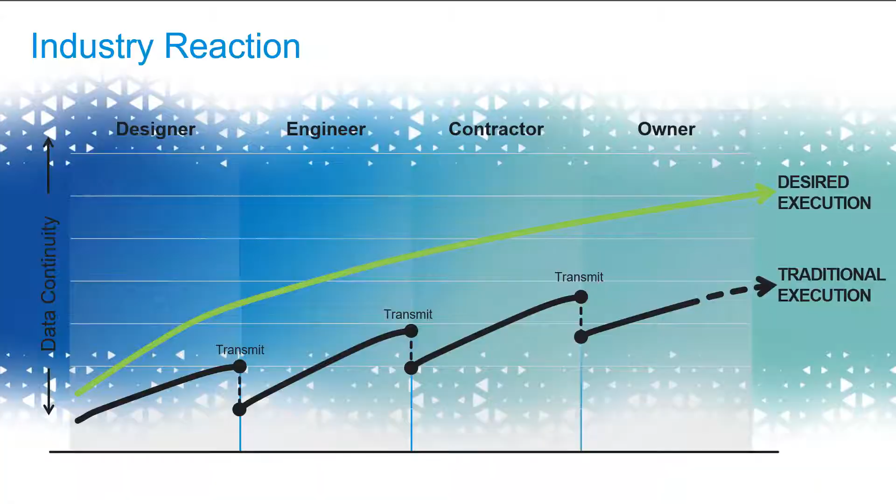So these are the solutions we are going to tackle with our AEC solutions today. We'll focus on security and accountability, on team communication, and on simplifying with easy to access tools the project complexity management. Let's start by discussing desktop-based collaboration. Desktop-based collaboration is covered mainly by the AEC collection, which is part of our plant design solutions. So we will use AEC collections and BIM 360 to collaborate around our plant projects.

Here's a short example of a simple workflow based on plant design tools included in the AEC collection. First, we can take a look at the P&IDs, the process and instrumentation diagrams, and then based on those process drawings, we will focus on piping equipment, steel structure, which is covered by Plant 3D, some building elements covered by Revit, coordination with Navisworks, for example, and then we will also discuss the deliverables, which in Plant 3D are the bill of materials, the isometric drawings, and the ortho used for layout drawings.

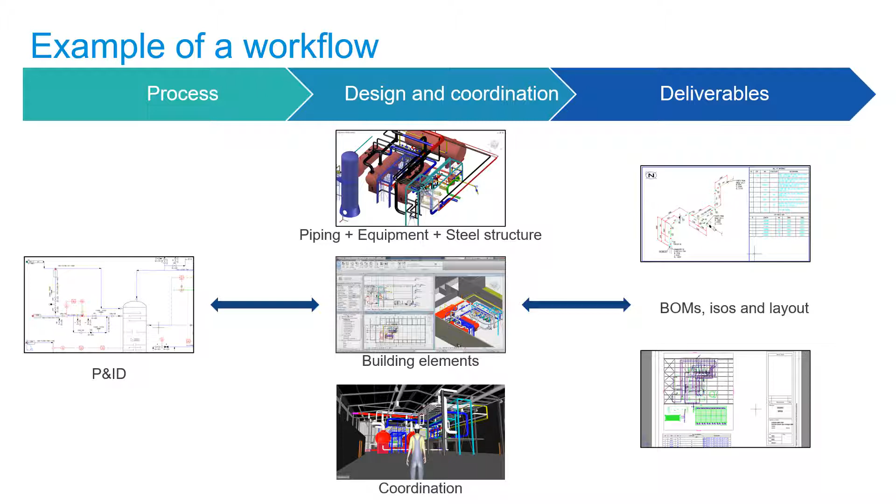The Plant 3D environment is easy to access and allows fast project creation and management, as you see here. We have a very easy to access wizard to create new projects. The database is set up automatically. It's either SQLite or SQL Server. We'll discuss that in the third video. Customization is quite simple since it's needed by most of the users. This will be very important to us, and there's no real programming to do it. It's quite simple and accessible. Project templates for project replication. So this is also part of the ease of project creation.

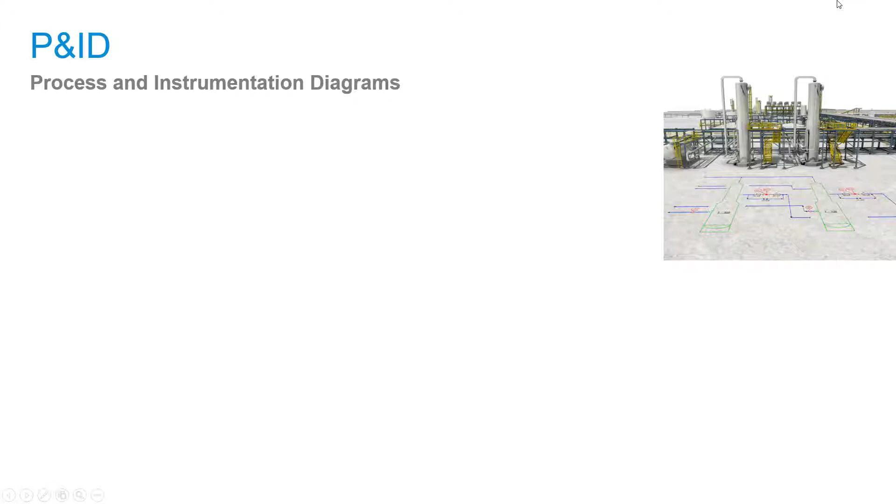And we are on the AutoCAD platform, so we can import and export DWG files very easily. If we had to look at the P&ID drawings a bit further, again, the two master words here, master ideas, are easy and fast drawings, using standard symbols that can be easily customized, of course.

We can model the diagrams, the drawings, using specs and respecting specific specs that were set up by CAD admins. The lines and the components are of course intelligent, so they are dynamic. The symbol management is quite easy to access with graphic interfaces, graphic UIs.

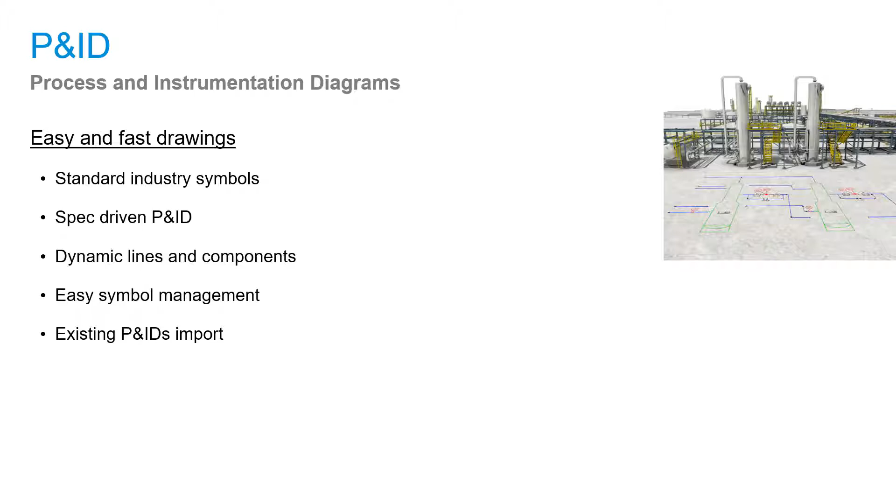And we can also import existing P&IDs, not only digital, but also sometimes scanned ones. The data management is the base layer of our solutions. This would be the database, which is organized in a project tree. The project tree is just a Windows folder, easy to move, easy to manage, with folders, subfolders, and all the files. The database is, as usual, in this project folder.

Deliverables, drawings, quantities, bill of materials. Intelligent link drawings, that's another thing to discuss because that's quite important. All the P&IDs can be intelligently and dynamically linked together from a line to another. You can revise data using the data manager of Plant 3D, and the tags are also dynamic. So when you tag line components, they're dynamic. They are changing when the line changes.

The first point of access for editing or informing people about the project would be Microsoft Excel, which is quite easy to use and well known. So we can export spreadsheets and import them back. The system will recognize changes in this case. And we also have consistency checks between P&ID and 3D data, 3D piping. So it will enable us to make the project consistent.

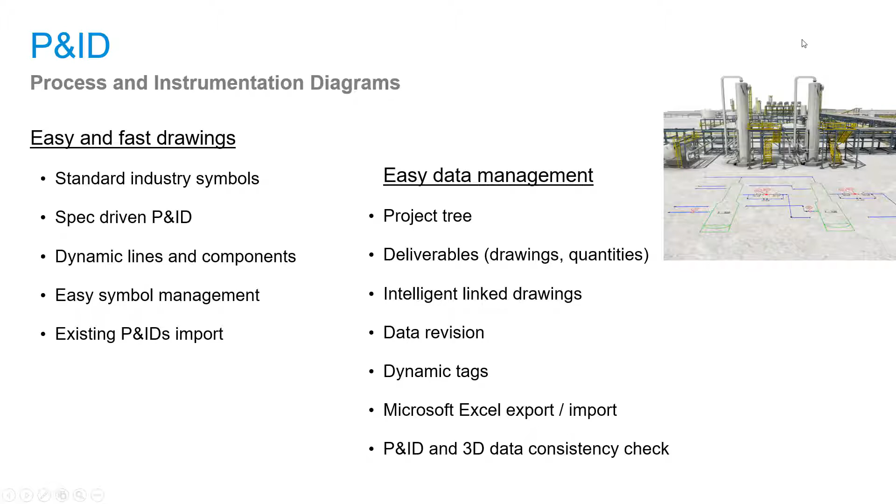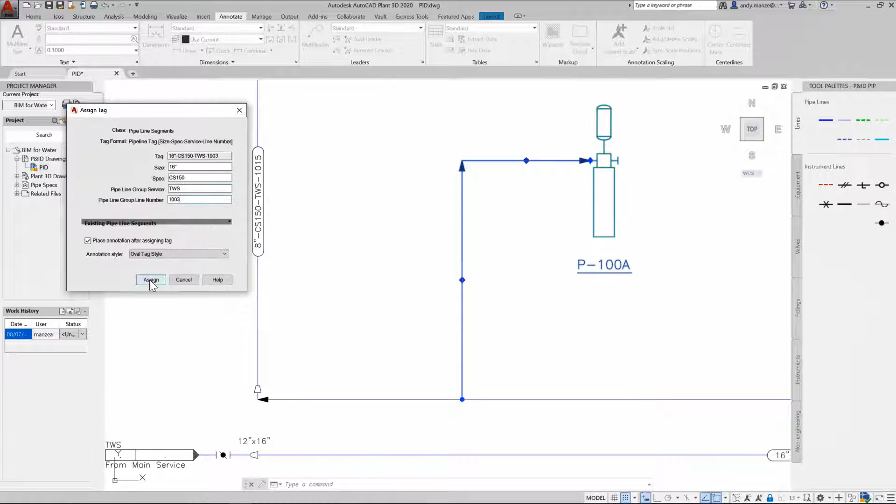Let's take a look at a short video around P&ID. As you can see, this is the P&ID interface. The project manager on the left manages the whole project. Now we are using a spec-based tool palette to model equipment and lines. We can modify them, assign tags based on specs that were set by our CAD admin. We just need to name the spec, name the diameter, and the tags are automatic and dynamic.

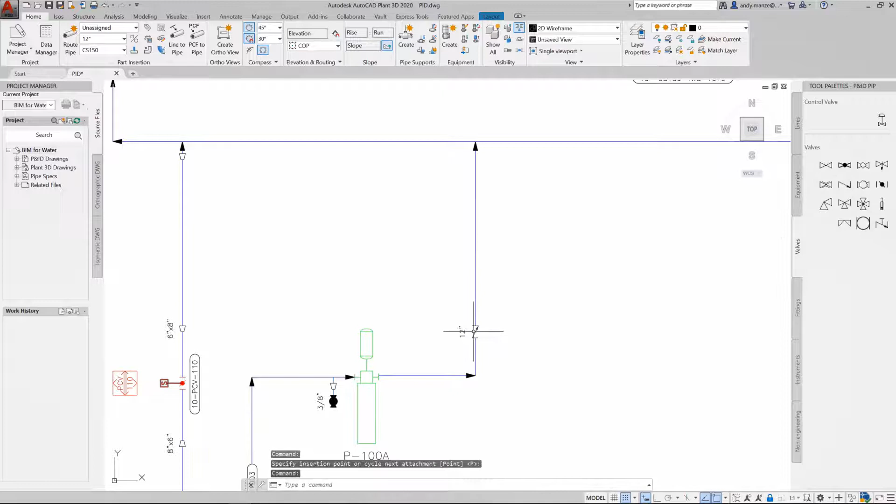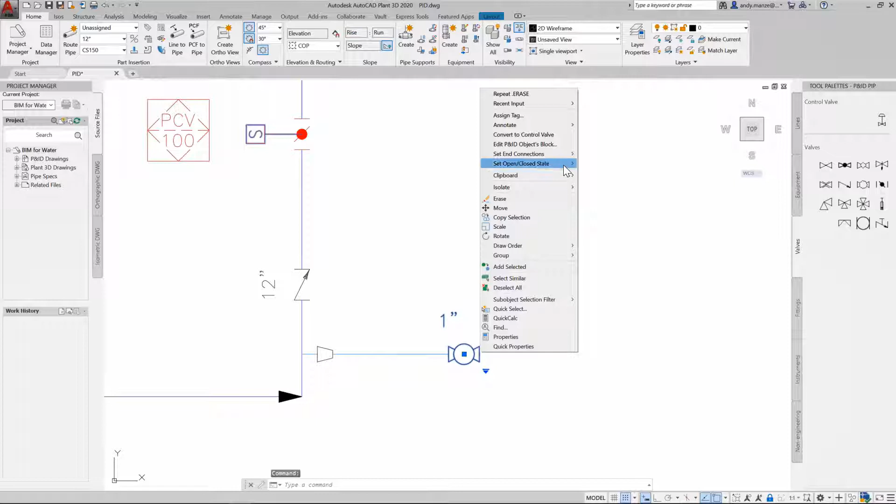The valves and other inline elements are completely dynamic. As you can see, if we change the diameter, the tags are also updated automatically. So this is another line we are creating here, inserting one or two gate valves, which are again dynamic. And we can also use instrumentation valves to control our lines. So this is the instrumentation part. We can easily control our valve status and use AutoCAD's classic copy-paste feature to copy-paste P&ID elements.

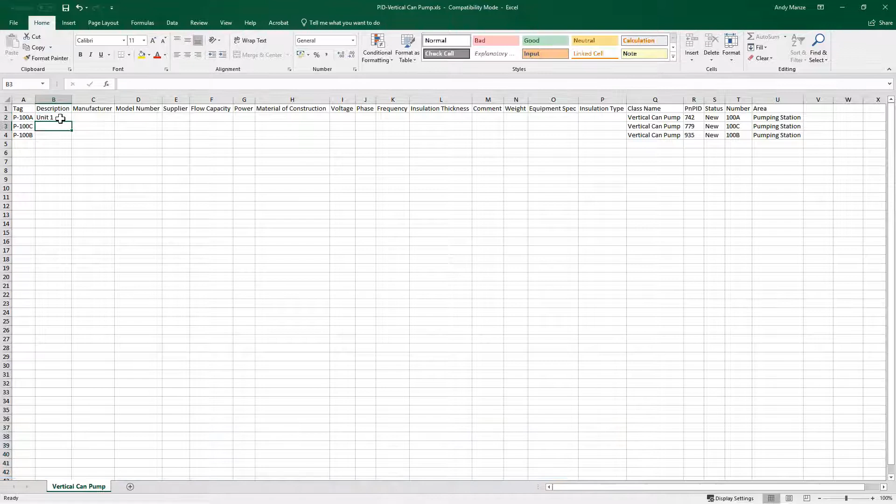This would be the data manager. We can use spreadsheets to export the data. An engineer can, for example, dimension a pump or change a valve status, and then we can re-import that back from Excel. The data manager highlights all the changed elements and we can either accept or refuse all the changes. Equipment or valve reports are really easy to set up as well within the data manager in the solution.

Let's now talk about the 3D aspect of Plant 3D, I would say, which is all about piping, equipment, and basic steel structure. The pipe routing here is spec-based, just like P&ID can be. The equipment is parametric. We can draw basic steel structure like columns, beams, stairs. We can also import and export Microsoft Excel spreadsheets, as you saw for the P&ID.

And then the deliverables would be isometric drawings, layouts. We call them auto drawings, layout drawings. And we can also fully customize in a very easy way the catalogs and the specs. And as mentioned earlier, the 3D aspect of Plant 3D is also integrated with P&ID, with sanity checks and reuse of P&ID data automatically, for example.

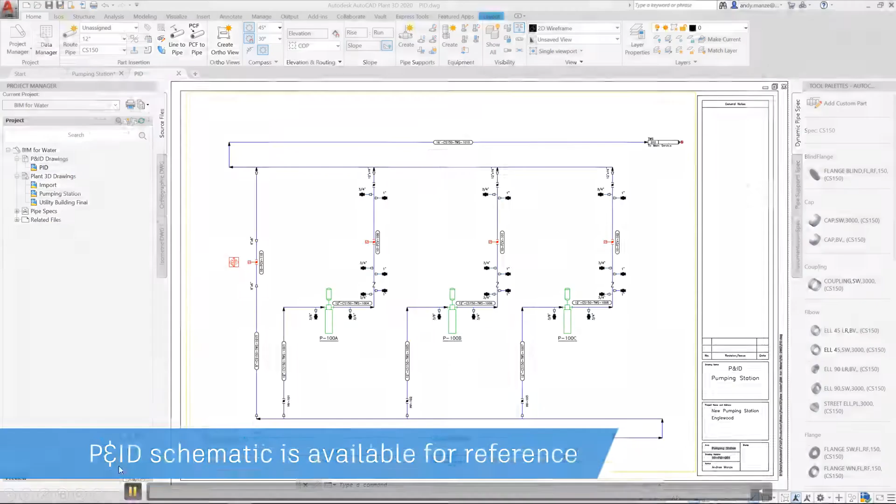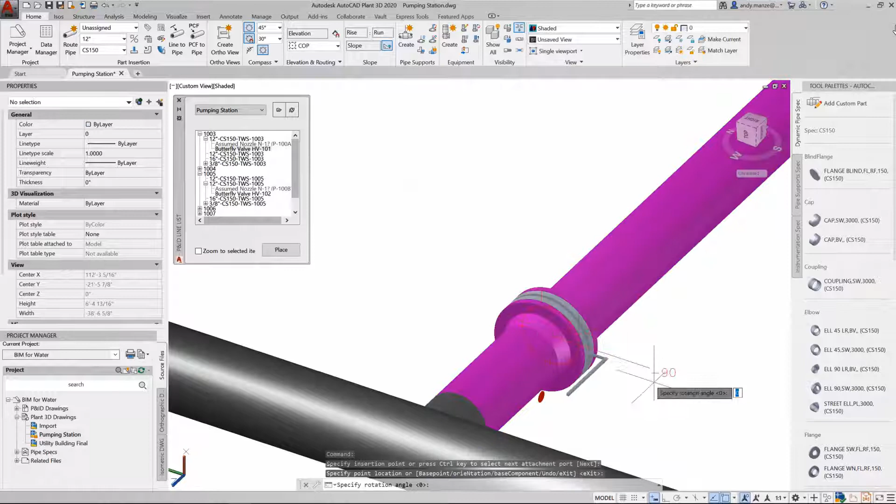Let's take a look at a 3D piping video. So we will reuse the P&ID elements. You can see them in the list here to draw, to model the 3D piping on this 3D drawing. So we just use two P&ID lines. Then we will add the inline elements, the butterfly valves we had on the P&ID. As you can see, the elements are fully intelligent.

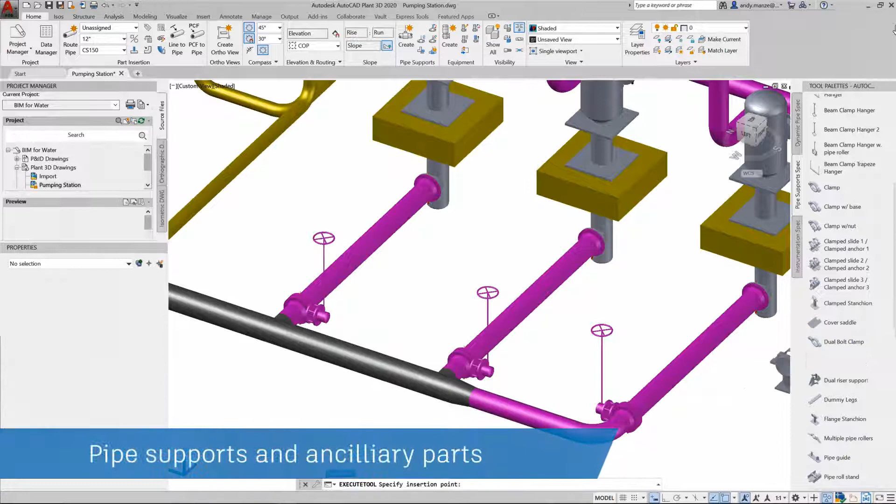We can change the levers, for example, if needed. This comes from a specific library that can also be customized. You can also change some of the geometry in this drawing. We can add supports that adapt automatically to the nominal diameter, for example, and to the line tag. They can be easily modified. This solution can be used with metric units, but also imperial units.

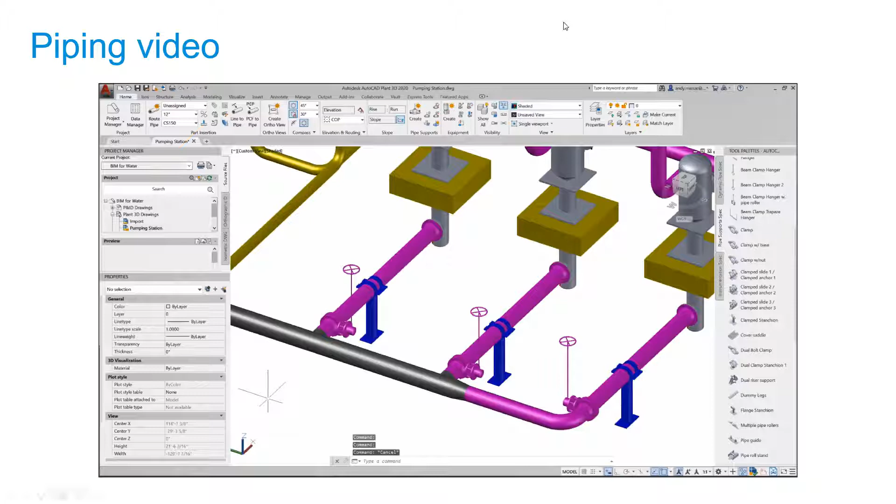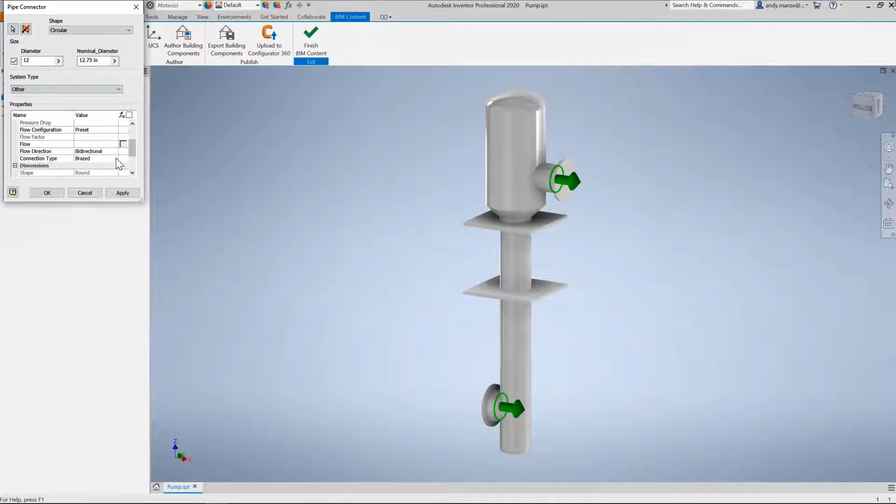Let's take a look at the equipment aspect of Plant 3D. We have a quite nice and complete library of equipment elements. But should you need to customize that, you could also import elements from equipment design software such as Autodesk Inventor. This is what we do here, and the export will keep the main setups like the entry points, etc.

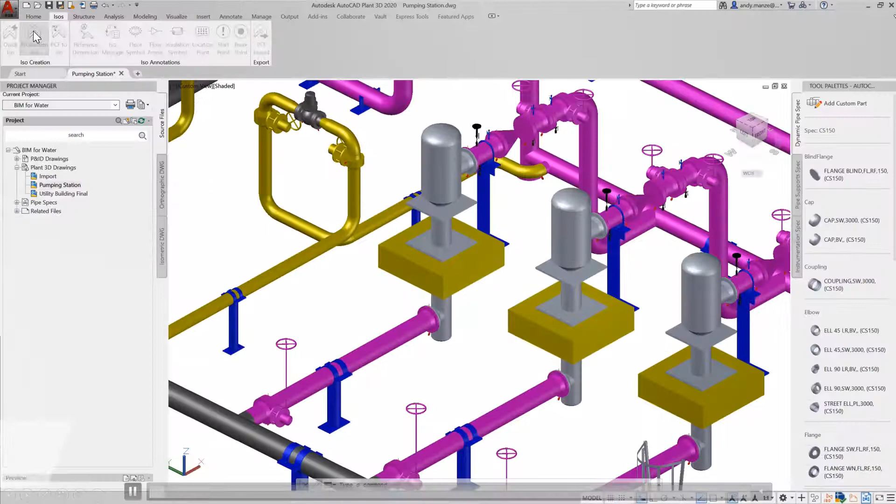Let's take a look at deliverables. Again, based on our 3D modeling, we can easily generate isometric drawings, but also layouts, piping layout drawings. We call them auto drawings. That's what you see now.

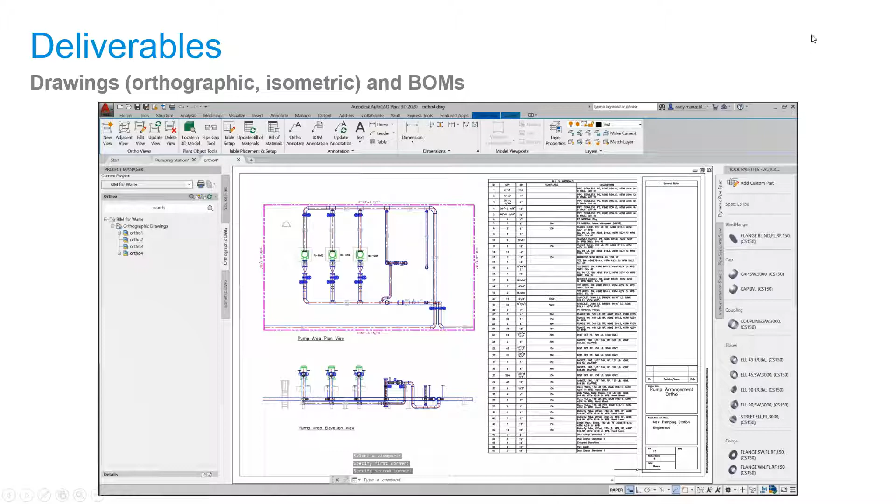You can add bill of materials from these elements on the drawings, which is very important. So isometric and orthographic drawings with full bill of materials, dynamic bill of materials.

Should you need to build a full project report in terms of deliverable, that's also important. We can easily query the plant database to build more complete reports around more elements than we can do in the plant project with data manager.

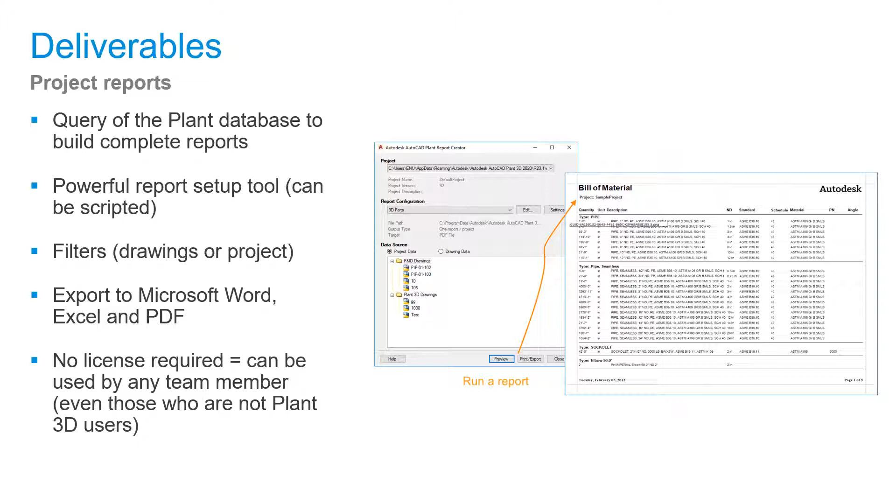Here we will use the report creator. This is an external tool for which no license is required, so anybody can basically access the project without being a plant user and without needing a license. So this is a powerful report tool that can be scripted and customized. It contains filters working for drawing or projects, and we can easily export a consistent project report to Microsoft Word, Excel, and/or PDF format.

Let's take a look at Revit. Revit will help with building elements here. Just as a reminder, a Revit file is just one full database containing everything. In fact, it contains parametric families - all the objects, views, and all the elements you can have in a Revit file are called parametric families.

This solution addresses three main groups, which are architecture, structure, and mechanical, electrical and plumbing, MEP. You have a very quick, short example of the different extensions of Revit files on this image.

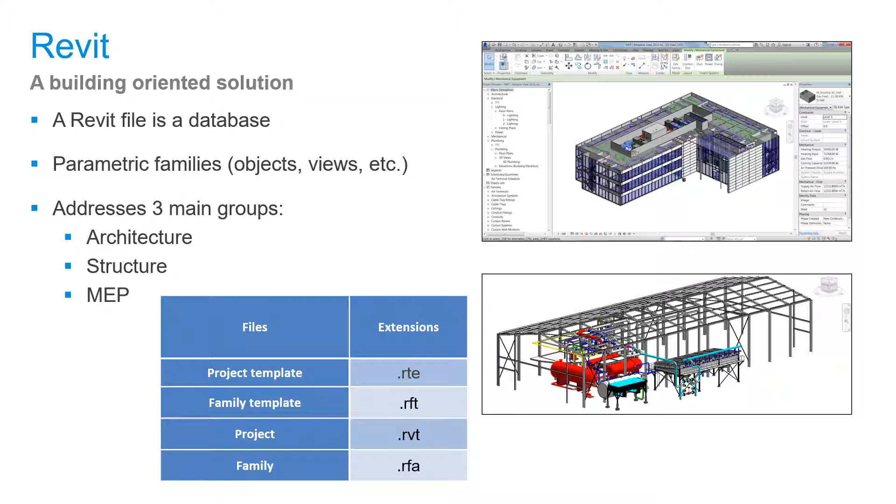In a Plant 3D project environment, Revit will help with building elements, mainly cable trays and ducts, but also concrete design for formwork or rebar, should you need to design these elements.

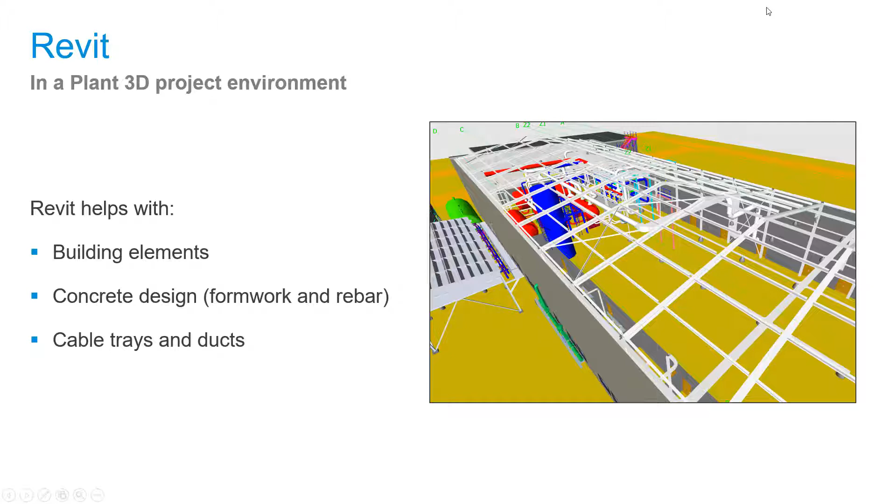We also have Advance Steel for steel detailing and fabrication. This is, of course, another AutoCAD-based application that communicates quite well with Revit, Plant 3D, and Robot Structural Analysis.

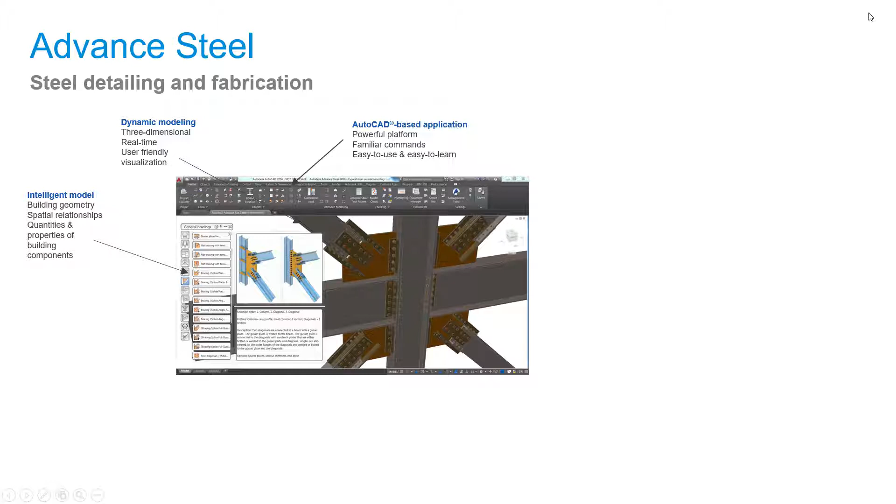The idea here is to use dynamic modeling, using a very dedicated tool palette with pre-created elements that you can just change. You can easily change the geometry and the forms. We have a bunch of steel connections.

There is also a clash check functionality. You can use this for customer presentations, of course, but one of the most interesting aspects is also the BIM workflows - the connection, as mentioned, to Revit, Robot, Navisworks, Plant 3D, which is of course native.

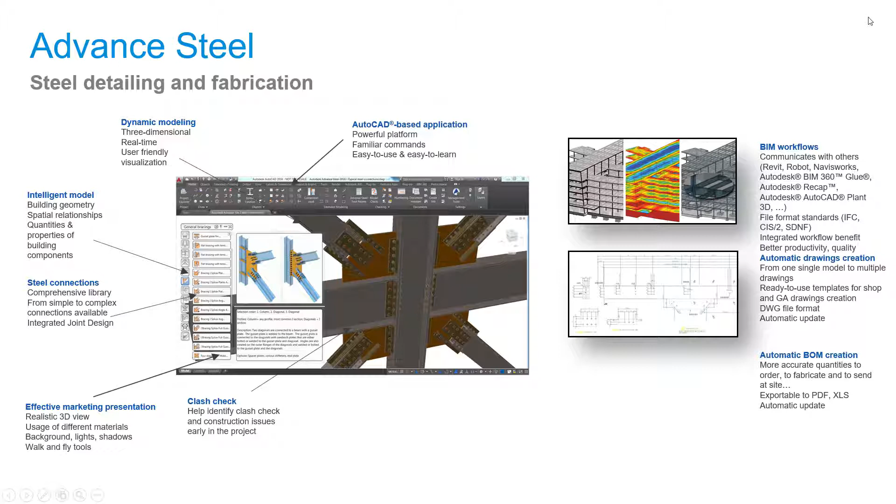Based on that, we can easily generate fabrication drawings for steel members and connections, but also perform automatic CNC data creation. You can work in a multi-user or single-user mode.

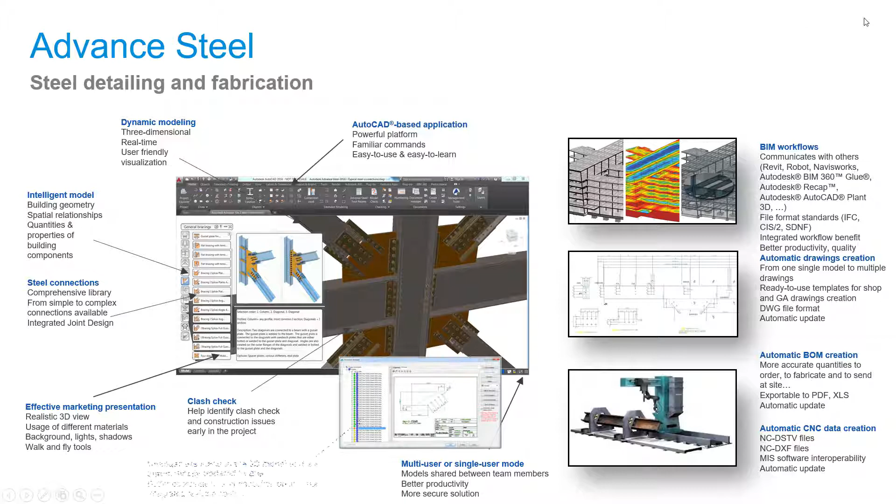Should you need to perform multi-material analysis or code check on your structures - be it steel structures, concrete structures, even timber structures - Robot Structural Analysis helps with that. You can also perform dynamic analysis, for example seismic analysis, on your structures to see if they fit.

Also, for example, steel member supports can be dimensioned and code-checked with this solution. Robot is integrated with Revit, Advance Steel, and also Plant 3D.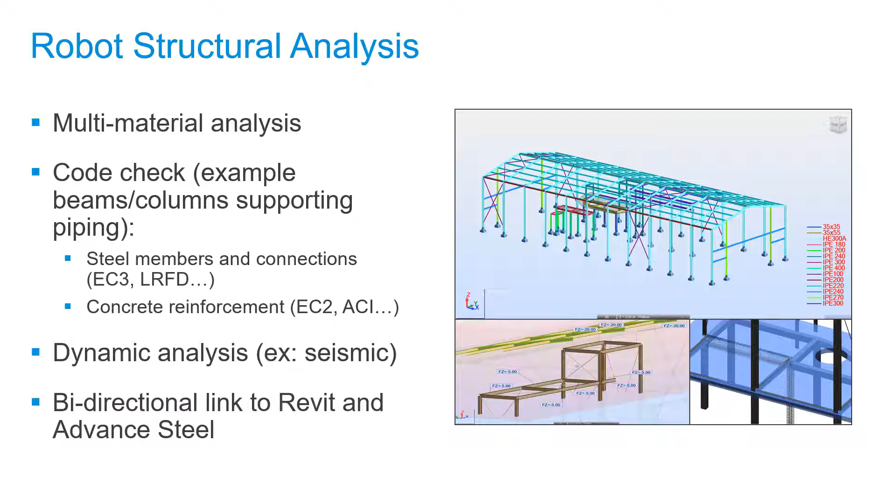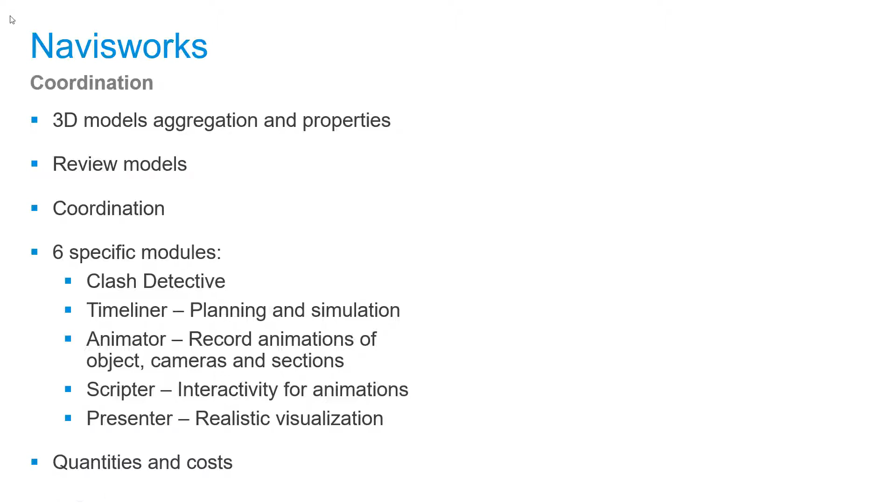For coordination purposes, we can use Navisworks. Navisworks is a great 3D model aggregator. We can aggregate models, but not only models - also the properties of these models - and bring together multiple format files. We can then review models and coordinate them thanks to 6 specific modules, like Clash Detective, which checks clashes. This is the one Navisworks is most famous for.

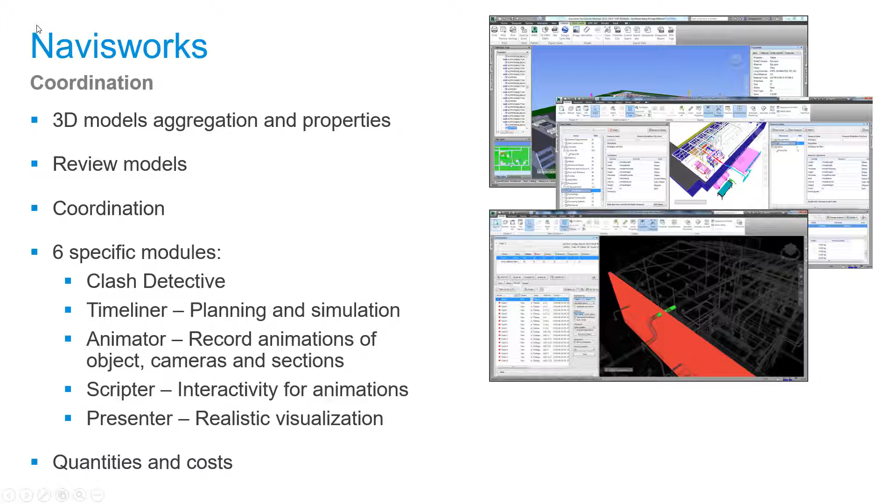Timeliner, Animator, Scripter, and Presenter - those are the 6 specific modules that help, for example, connect construction to a construction planning. We can also easily generate animations and script all that to make realistic visualization presentations. Another aspect of Navisworks would be the management of quantities and costs in a construction environment.

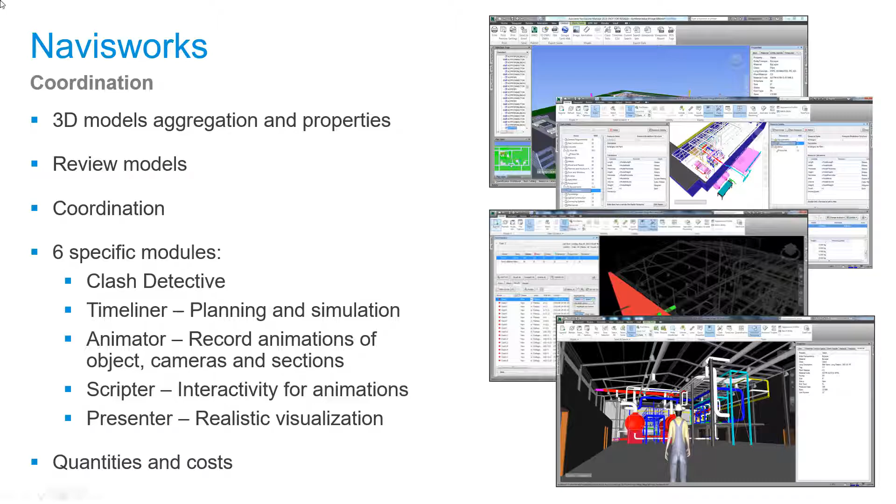Let's take a quick look at the coordination video. This is a complete pump station 3D model combining Plant 3D, Revit. This is Revit. This is Navisworks. This is where we combined all the models together, aggregated all of them, and checked clashes - for example, steel beams and pipes.

We can then assign a clash in a really easy way, and people will be notified. They will change their design model, and we can bring that back to Navisworks.

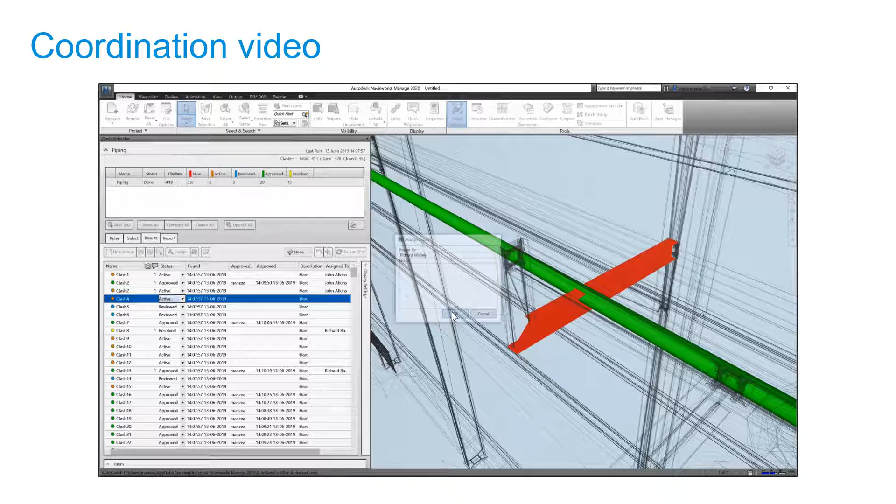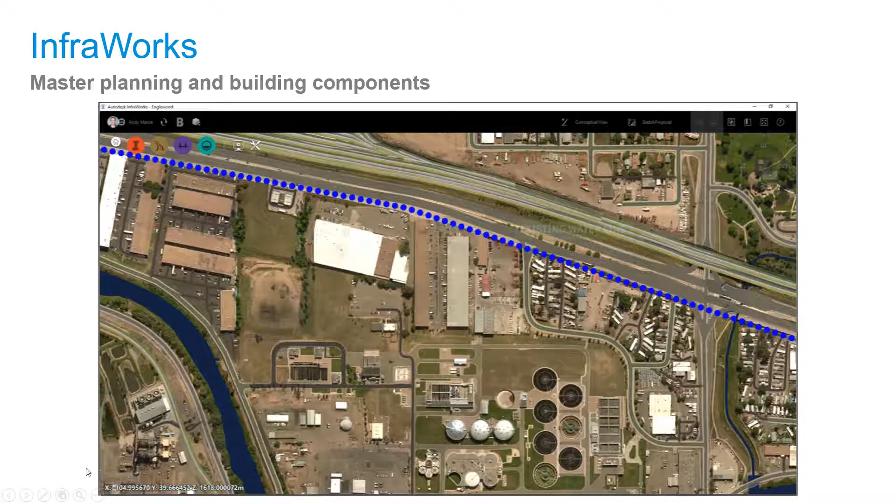Should we need to address master planning and building components, we can use InfraWorks, which is another great solution included in the AEC Collection. You can study master planning, surroundings, bring that into Revit and Plant 3D, and build the elements.

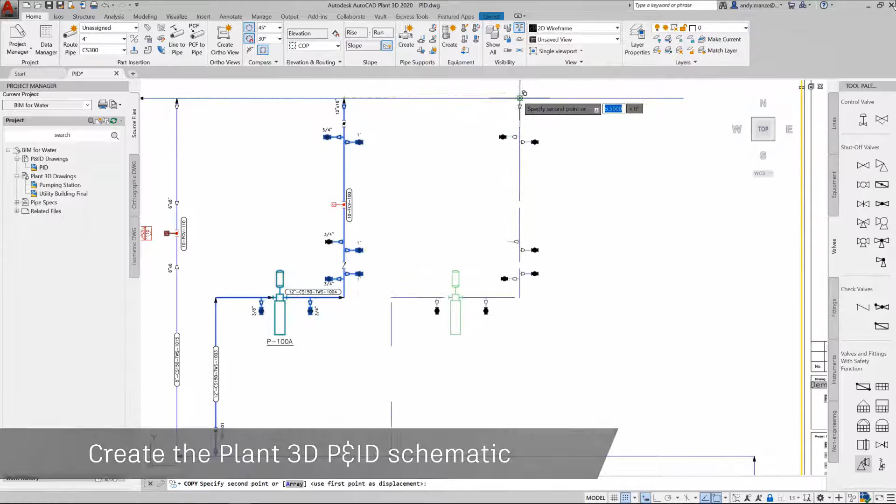They use P&ID to understand the process when designing or pre-designing the facilities. All this is linked to the database and everything is linked together, P&ID and Plant 3D, as stated before.

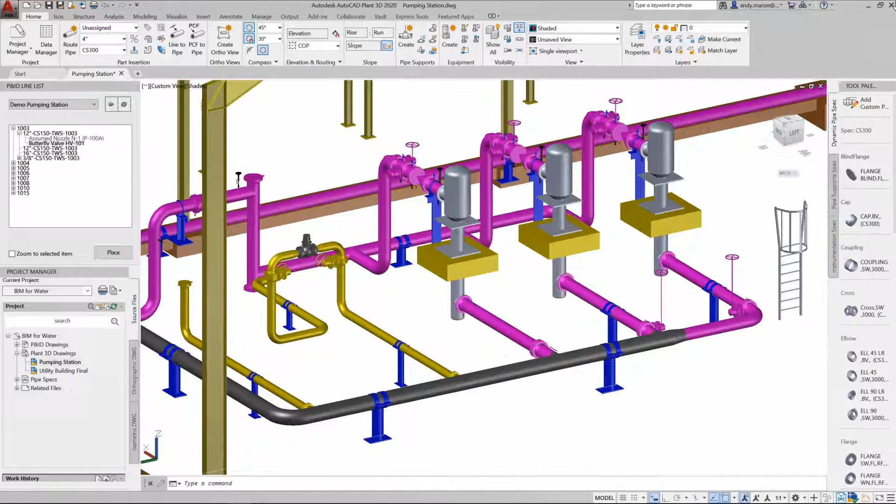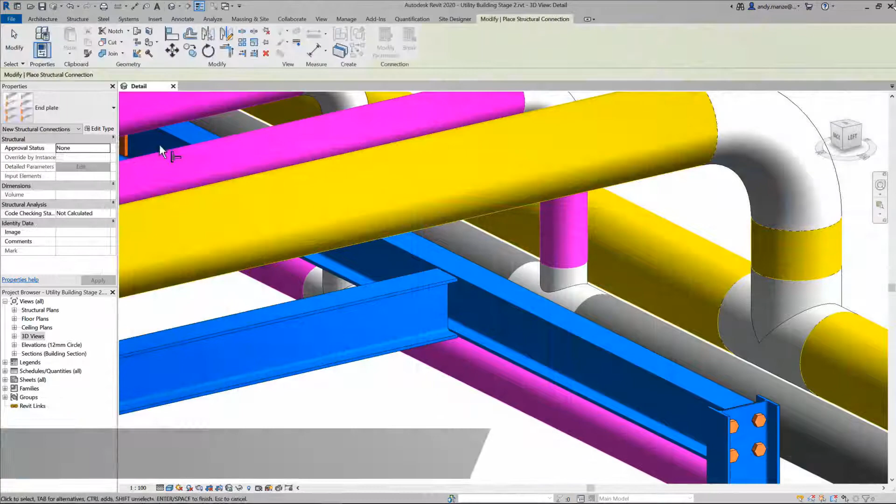And all this is included in Revit, for example, to combine structure models and piping models. You can then use connections and bring them back to Navisworks, where we can detect and assign the clashes.

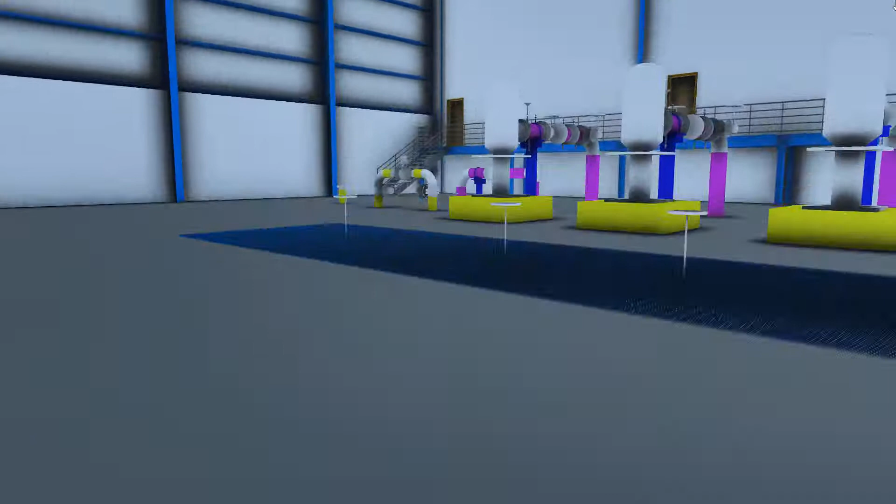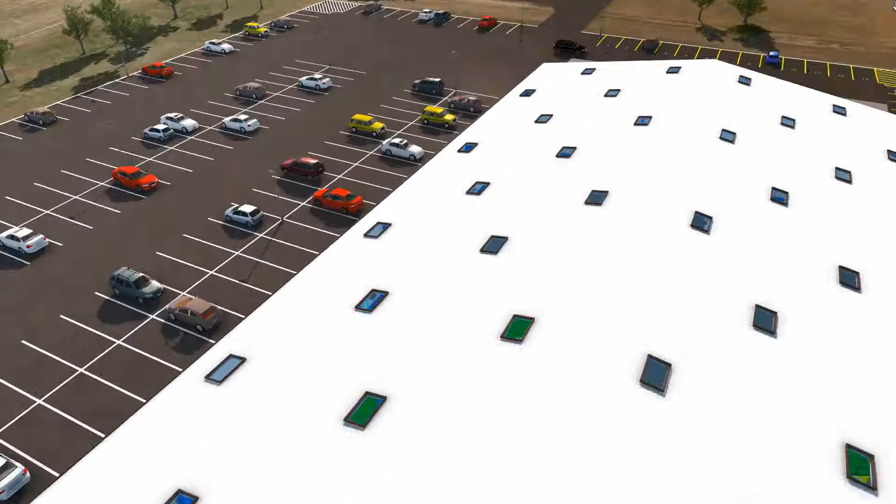We can then generate nice visualizations when we combine everything into InfraWorks to understand the inside of a plant, but also the surroundings.

Next step would be to discuss the laser scans and photos, which are addressed by ReCap Pro. You can capture the environment, perform as-built comparison, and also have accurate measurements.

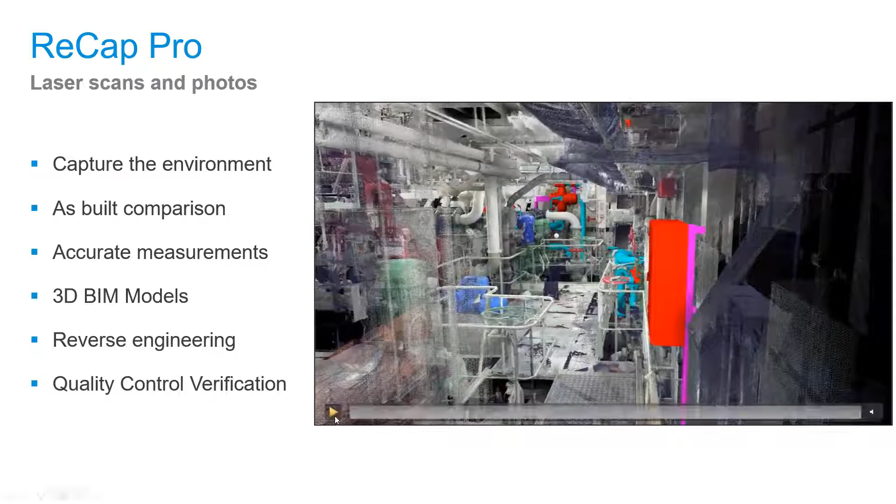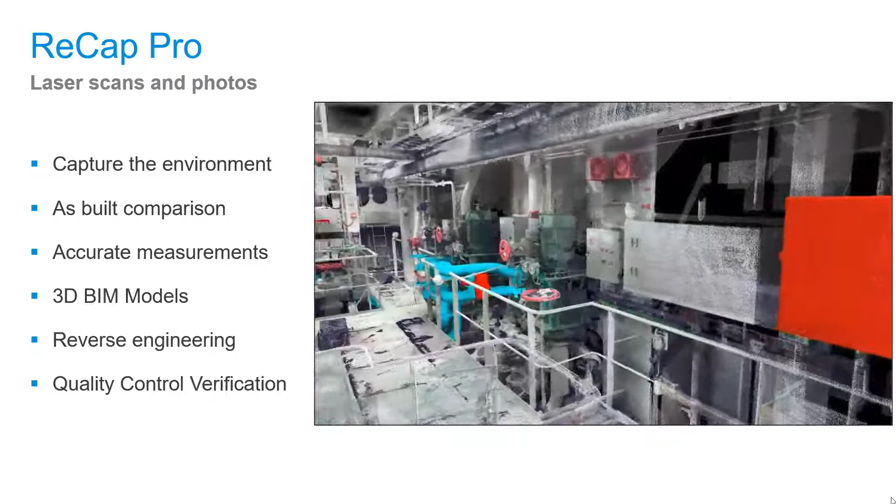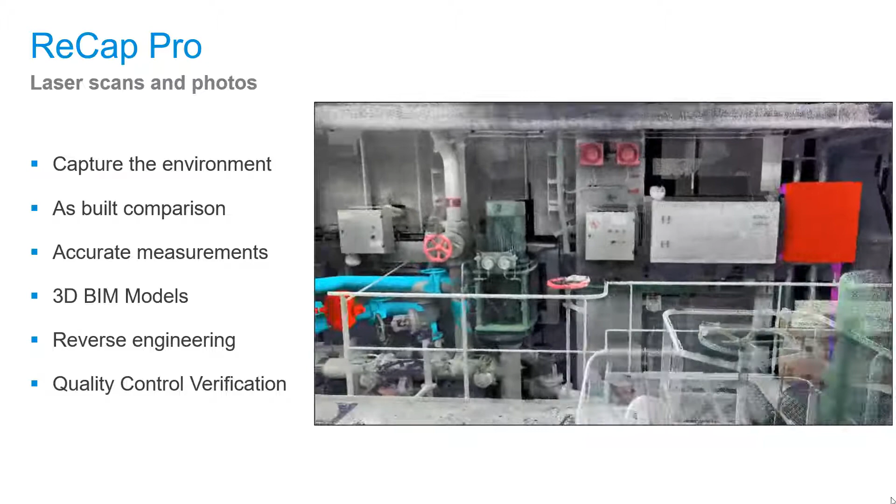As you can see in this video, we can mix laser scans and photos with 3D BIM models for comparison purposes, or just understanding the layout or understanding the danger zones and safety zones. We can also perform reverse engineering thanks to those solutions and quality control verification.

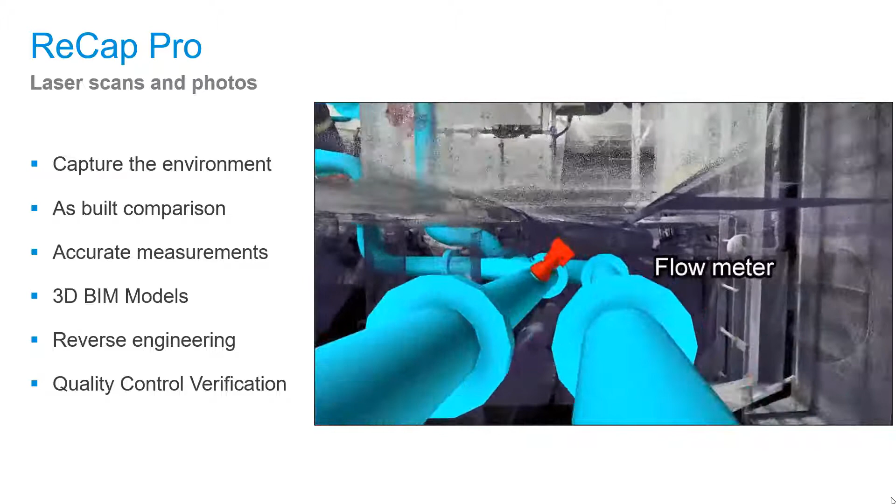As you can see in this video, the different elements from the 3D model are identified, and we can see them in context using the not-modeled but scanned rest of the plant and the surroundings of those 3D model elements.

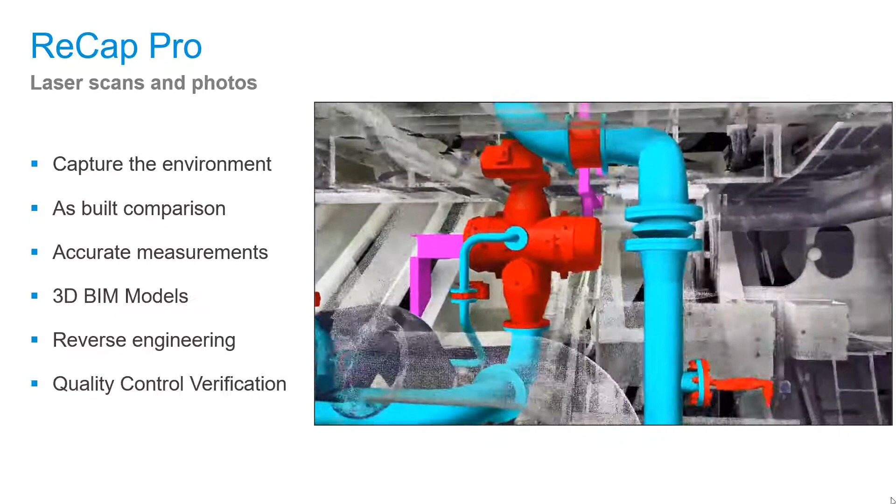Let's now quickly take a look at the database structure. Basically, here I described what's inside the plant project in terms of database. Earlier in this video, I told you that a plant project is just contained in a Windows folder. This is the case. The plant project is just a Windows folder containing subfolders and the databases - the project databases, the specs, specifications databases, and also the DWG drawings.

Usually the project is local in a Windows folder or managed by Vault, which will be covered by a third video in this series. The catalogs, usually like ASME catalogs, are usually feeding the specifications. They are external to the project, usually stored on a network drive, or locally on your machine, or in Vault, depending on the project needs.

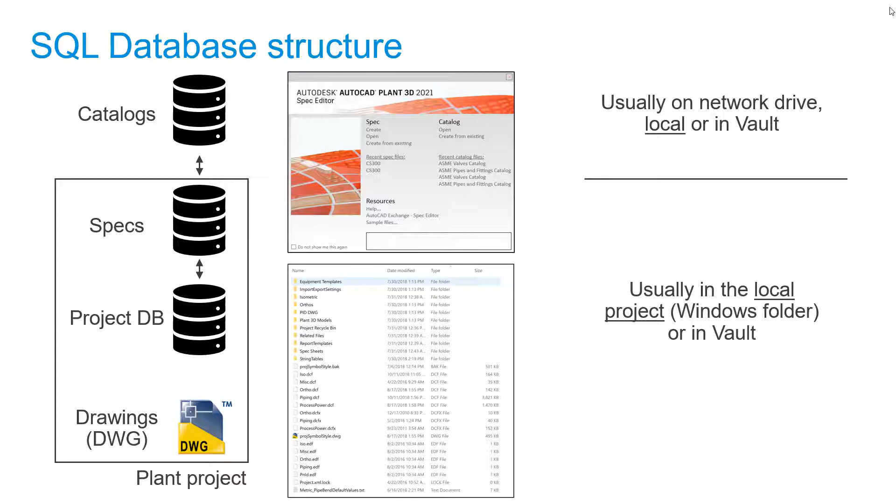Let's take a look at a quick video around catalogs and spec management. We can easily access the spec management from within Plant 3D by using the project manager I described earlier. Let's take a look at the Carbon Steel 300 spec, which is a quite classic one, an ASME one. When I hit edit spec here, an external program will open the specification. This program is called Spec Editor.

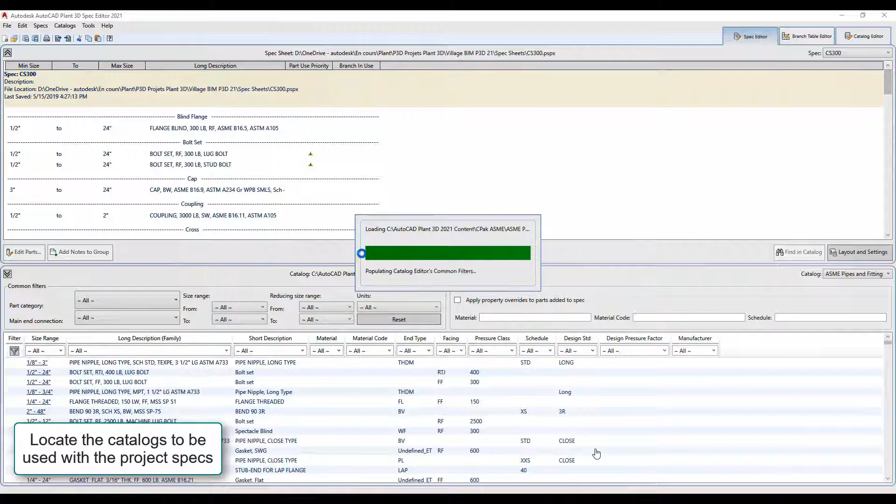This is a CAD admin, BIM admin program, which allows you to create and update the specs based on the catalogs. This program doesn't require a license, so you don't need to be a user or to have a license of Plant 3D to use it and to create and manage the specs and the catalogs.

Catalogs can be loaded freely from our Autodesk App Store. We have a quite large number of free catalogs created by Autodesk, such as UK Ductile, American Content Pack, Pharma Pack, EPEX, etc.

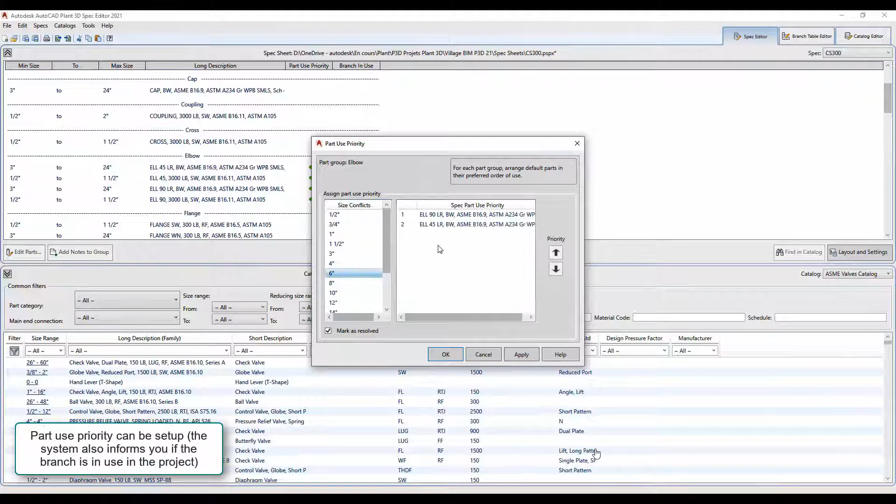The upper section of the spec editor shows the specification, what is contained in the spec. We can also see the priority - for example, for an elbow of 6 inches, will it be preferable to use a 90 degree elbow or a 45 degree elbow?

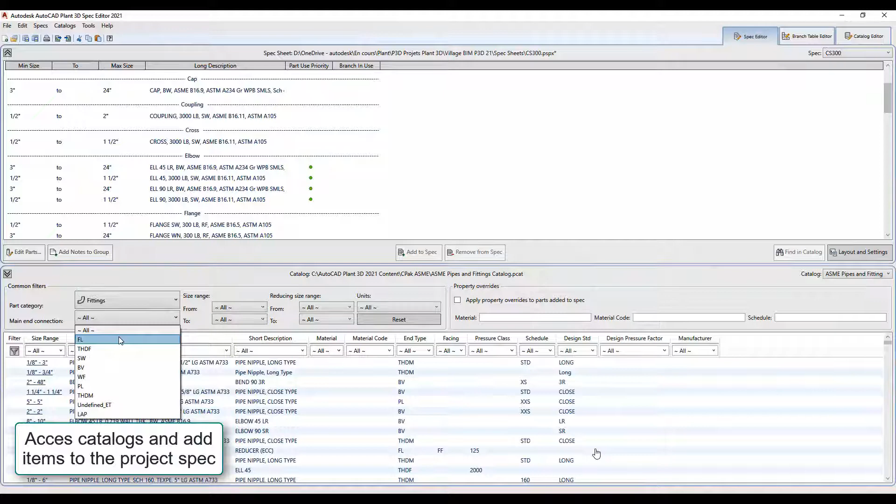The bottom part shows the catalogs. We can access them and filter them in an easy way. You can filter on the fittings, for example, with a specific end connection, and then just pick the element and add it to the spec. You will see it in the top list. We just hit add to spec here, and we will add a new elbow, 45 degrees.

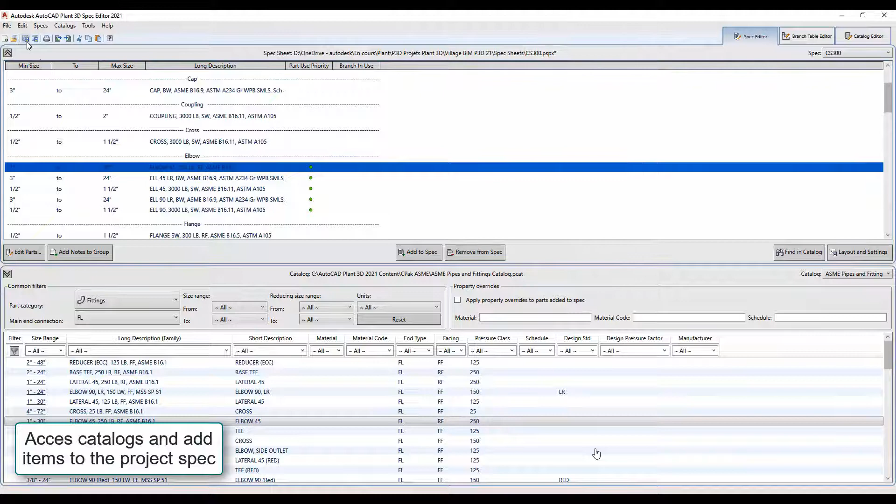We will then save the specification so it can be used in Plant 3D. It's quite easy to export and import to and from Excel.

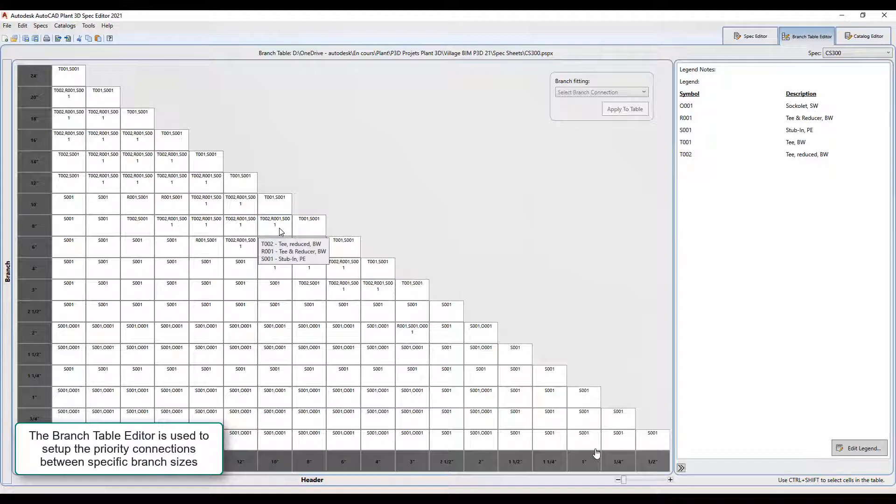The branch table editor is quite important too. This is where the CAD admin decides how to connect, for example, 8 inches to 12 inches pipes, with a specific priority between T's and reducer, stub-ins, sockolet T's, etc.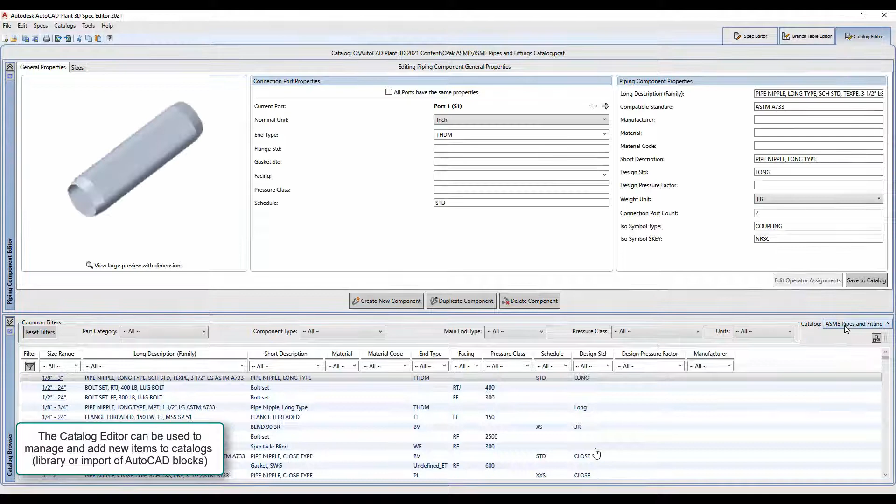The catalogs can also either be built, modified, or managed here. Let's pick a pipes, ASME pipes and fitting catalog, and just look at an element. This is just a regular pipe nipple. You can see that we have all the geometric and all the other info and properties.

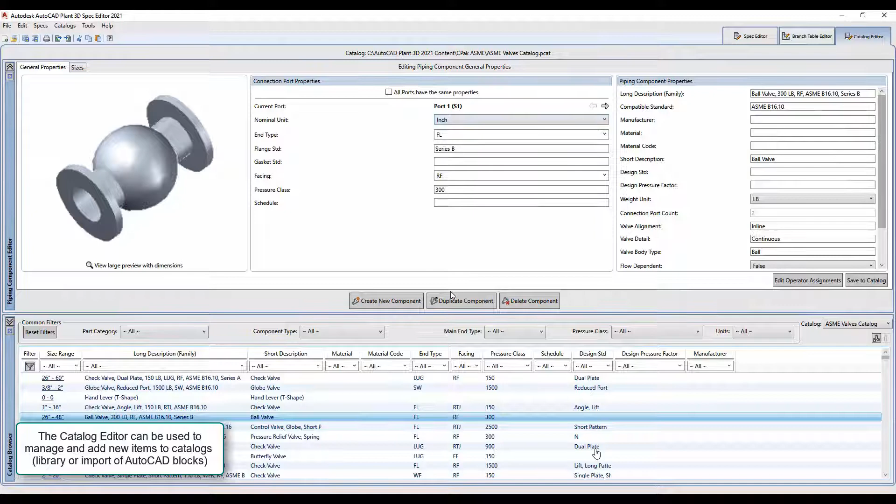We can very easily create new components based on either AutoCAD blocks or design programs such as Inventor, for example. We mentioned that earlier.

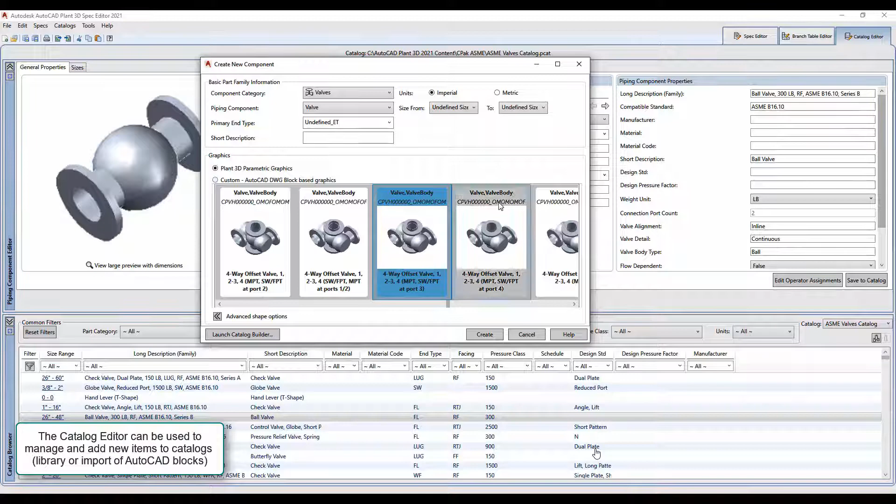This part of the video, I just wanted to show you how large the existing library is. You can either customize those elements or just create them from scratch using AutoCAD blocks, for example. We also can convert external tools content like CADWorx or AutoPlant, or anything that would export Excel spreadsheets.

The new element we added to the spec from the catalog is now available in Plant 3D, and we can easily use it for our design.

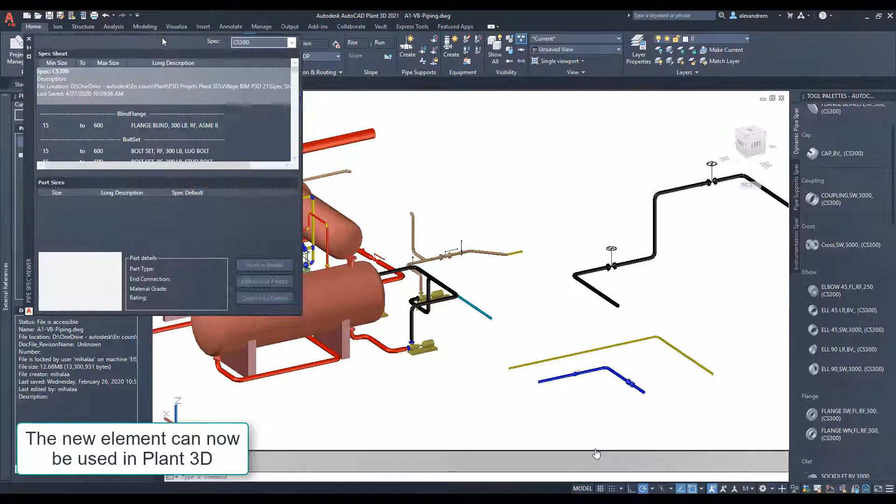We can also take a quick look at the spec in Plant 3D. We can see it as a list in a very easy and accessible way. This is our new elbow we just added to the specification from the catalog.

We also have another solution called Raster Design, which is just included in the AutoCAD package included in the AEC collections, where you can reuse and analyze existing drawings. We can specifically use that for scan drawings on plants, including P&IDs. We could also manage satellite images or aerial pictures in a very easy and friendly-to-use way.

We mentioned earlier the pipe stress workflow. We can actually export - so after modeling the 3D piping and maybe generating isometric stress drawings - we can easily export in a PCF format our 3D piping to a stress analysis program. We can then calculate and analyze the supports and bring them back to our 3D piping solution. So PCF exports to programs to perform stress analysis, and this would be the recommended workflow with our solutions.